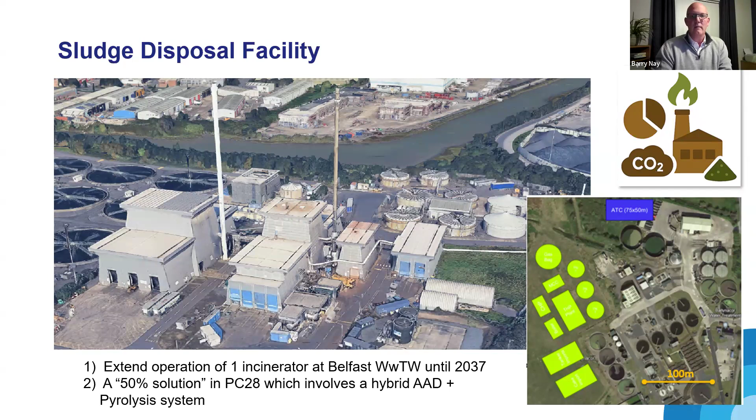Our proposal is to take one of the sludge facilities that is at end of life and replace it with a pyrolysis plant, which will be based in Ballynacor, which is Portadown, to take advantage of the new technology in PC28.

Then we have critical maintenance. We have an absolutely vast array of assets, sites, facilities across the country. There are hundreds of water sites. These range from our beautiful impounding reservoirs like Silent Valley, water treatment works across the country, service reservoirs, clear water tanks, pumping stations that keep our network at high pressure to your taps, and thousands of kilometers of water mains, trunk mains, distribution mains, enough in fact to go three quarters of the way around the world.

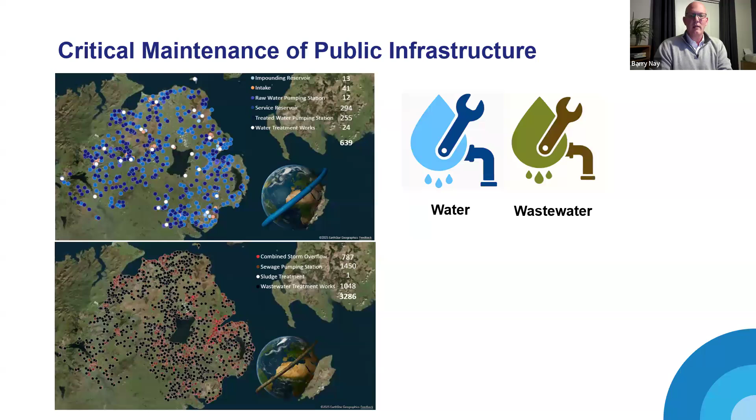Secondly, we have an even bigger public wastewater system. We have over 1,000 treatment works, nearly 800 overflows, 1,400 pumping stations, and again sewers, something in the order of 17,000 kilometers of sewers that we have to maintain, operate, and keep in good working order.

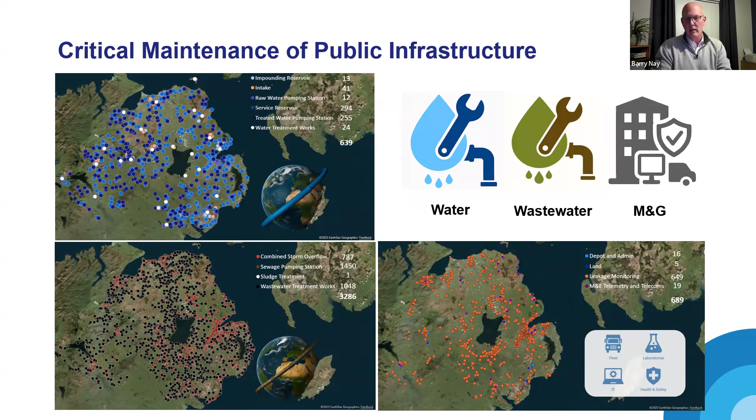And then we have a lot of depots and admin buildings and land, telemetry masts, etc. We have a fleet of vehicles we have to maintain, a laboratory, we have IT systems and health and safety systems that all fall within our management and general area. But as you can see, whether it's a soft asset, a hard asset, a linear asset, there is an absolutely vast amount of infrastructure that we have to keep going all the time to protect it. And so it serves the public.

In fact, our priority one is to keep our current assets healthy. If our assets are not maintained, they fail, they stop working and can lead to severe consequences such as water shortages, water quality incidents, severe watercourse pollution, property flooding, health and safety incidents, and even cyber breakdowns and shutdowns. We have consultants across the water industry helping us with our asset health right now. We have more data than ever before to show the life of the asset and assets which are actually expired and even sub-assets that have expired.

In order to determine the established needs in our maintenance assets, we are doing a bottom-up asset health approach for the first time through a range of modelling techniques. Plus, we're getting some independent assurance and econometric benchmarking. We anticipate that 1.2 billion of base maintenance will be required in PC28.

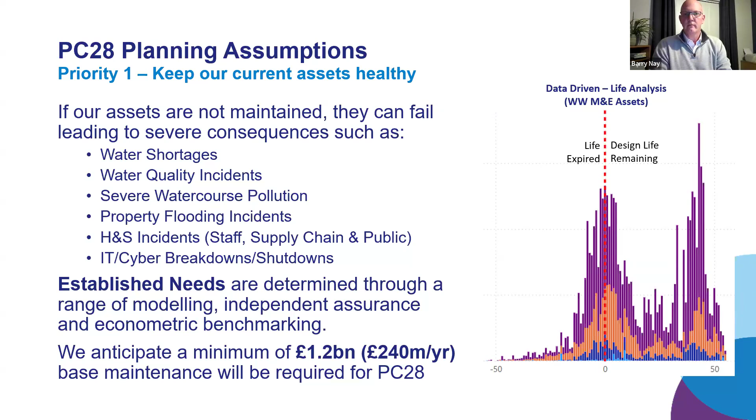We have 6 further enhancement themes across all of our assets. The first is cleaner, safer drinking water. Our water treatment plants need to be upgraded to meet stricter water quality standards that are being forced by the Drinking Water Inspectorate. These upgrades remove harmful pesticides and weed killers from our raw water and treat things such as THMs, which are byproducts from the chlorination and disinfection of water that we have to take out of the system.

We then have water on demand. Our summers are getting hotter and longer, making the public system more resilient so we can meet peak demands in hotter months and for longer, drier periods. This means boosting the network pipe and pumping capacity and increasing the volume of drinking water that we store so that we can manage peaks and demands, so we're not impacted by hose pipe bans, etc. in the future.

Then we have a very unique theme that is arising, which is Lough Neagh taste and odour. The blue-green algae that is manifesting in Lough Neagh eventually reaches our treatment works. Now, our treatment works are good at stripping out anything that is dangerous associated with raw water. It's very safe to drink. However, at peak times during the blue-green algae season, it can leave an unpleasant taste and smell for some of our customers at the tap, which, although not harmful, is very annoying and unpleasant. And so again, the Drinking Water Inspectorate has asked us to address these issues.

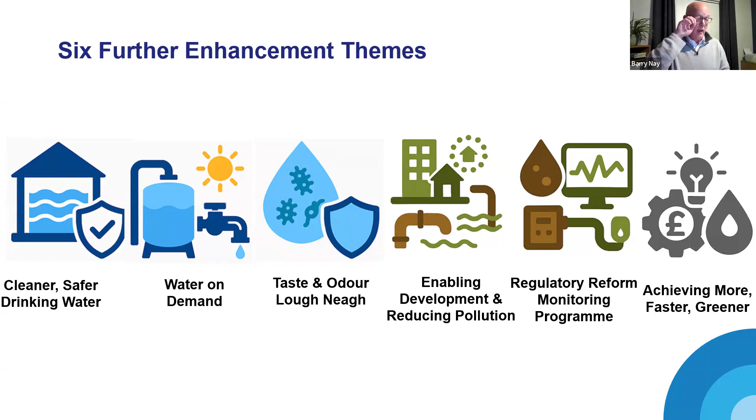At the same time, the Environment Agency is implementing a regulatory reform, setting the bar for our wastewater systems higher than ever, looking at the monitors at our overflows, unannounced sampling, catchment improvements, etc. And finally, we also as a business have to transform and innovate at the same time, driving efficiency of everything else to make the most of every pound that we are gratefully awarded.

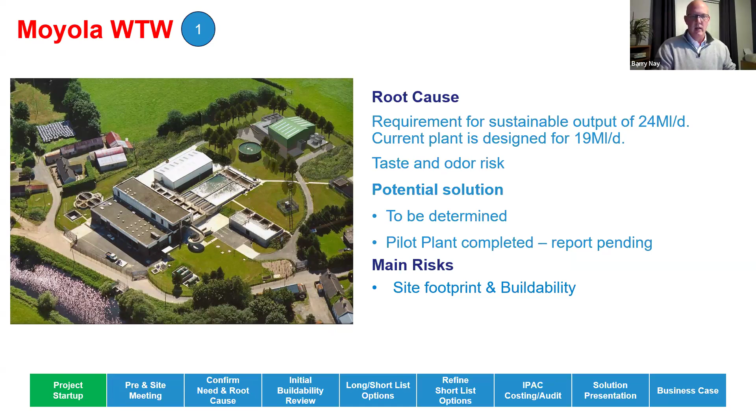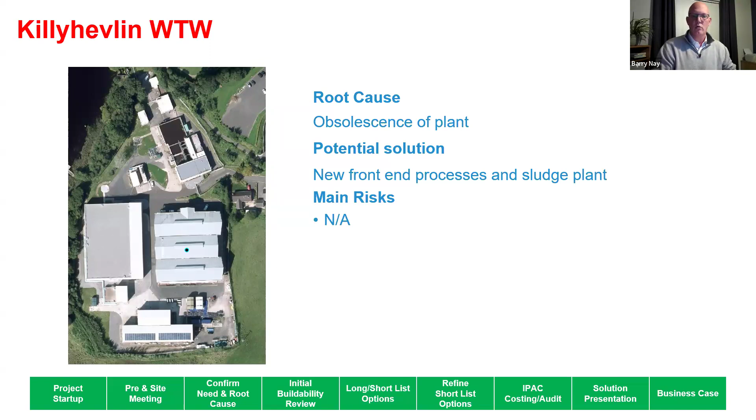Some of the big projects that are likely to manifest is Moyola Water Treatment Works. That is in the northwest of Lough Neagh. We require an extra 5 megalitres a day, and there's a taste and odour risk from the blue-green algae. Killyhevlin Water Treatment Works also is an interesting one. The process uses a thing called magnetite to filtrate the raw water, and that material is no longer available in a few years' time. So we have to recreate a new front end of this process to replace the magnetite stages of this water treatment works.

Castor Bay, one of our biggest water treatment works, also needs more water for the hot summers. At the same time, some of the internal systems, the primary filters, are undersized and not up to full UK best practice.

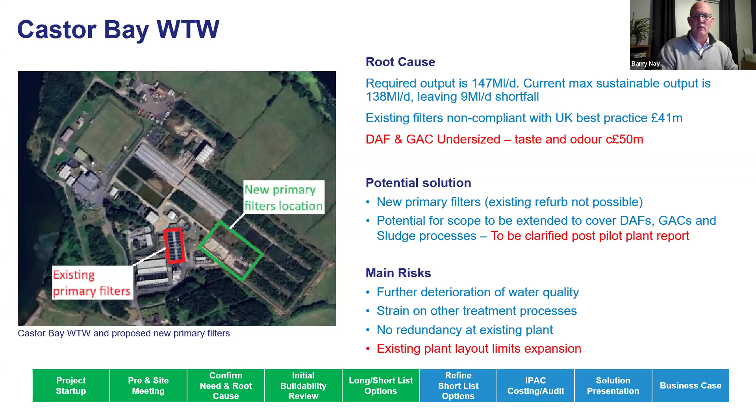And it is also susceptible to the blue-green algae. So we have a lot of water treatment works. I haven't touched the trunk mains and distributions in this presentation, but there's also trunk mains and service reservoir projects as well to go along with the water needs.

On the wastewater side, where probably the money is most likely to be constrained, we're following a new wastewater optimization process called EOIB, a catchy name, but it stands for Eliminate, Operate, Invigorate and Base. What we do is we take the need as seen by the regulatory drivers, and we try and eliminate it at source by talking to traders, looking for ingress, challenging the water order consent with state-of-the-art environmental models and simulators, and even changing customer behaviour to stop blockages, etc.

Once we've done that, we look into operating in different ways and invigorating the system using instrumentation, automation, efficient new cleaning systems, chemicals, energy optimization to squeeze as much as we can out of the assets that are there already. And then we do complementary base at the same time to replace M&E that is reaching end of its life. Only when that is done do we then look at enhancing the treatment works further.

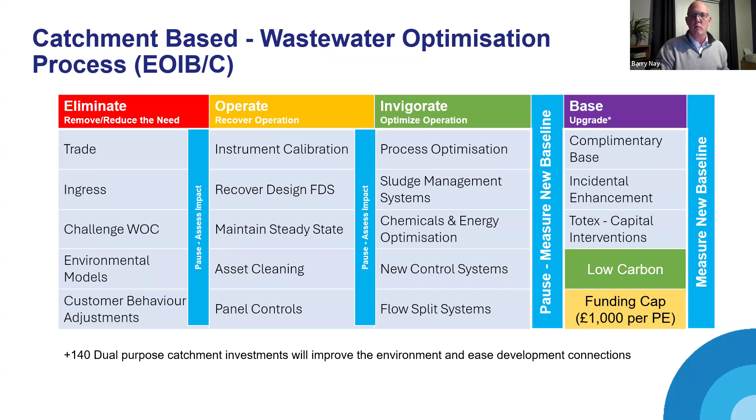Our PC28 plan sets out to deliver approximately 1/3 of these established needs. You can see that the M&G portfolio is 0.3 of 0.4 billion and the water portfolio is 0.9 of 1.3 billion. But the wastewater needs will take 4 or 5 cycles at this level of investment to fully resolve.

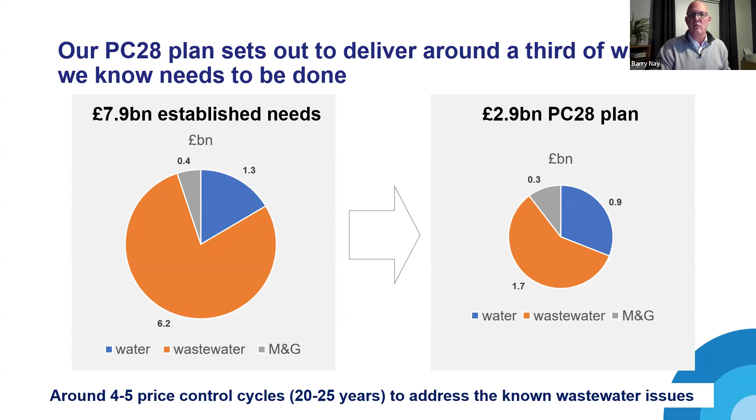When we come back to our graph and look at the top established needs based on the UR's regulatory principles, we can see the sludge disposal facility is good. 1 out of 2 sludge incinerators will be replaced. Capital maintenance is good. It'll be 50 to 60% of all envisaged capital maintenance can be undertaken.

Similarly, our essential maintenance for our fleet IT systems can be addressed. Water enhancement is about 60 to 70% of all the envisaged needs on our water systems. And then the wastewater enhancement, we make good progress into tackling approximately £1 billion worth of the 5 billion that has been identified.

So how do we actually turn this into a plan which can be delivered over 5 years? Well, the first thing we have to do is look at the glide path into PC28 itself. This year, we have £360 million of capital investment that has been secured already. And there are still some options for further investment for the remainder of the financial year.

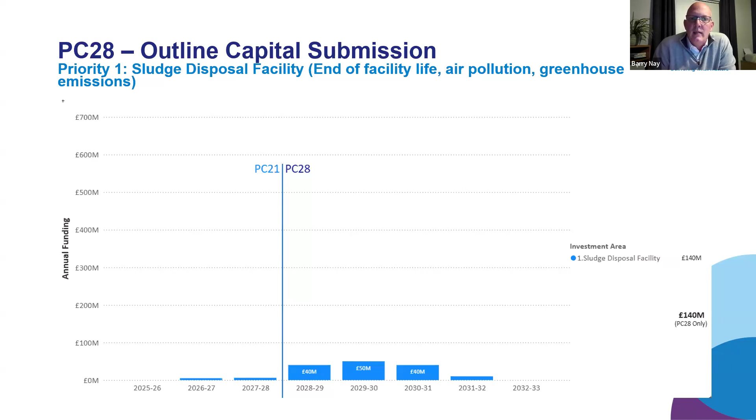So priority 1 is our sludge facility. We cannot let that facility die. It is a singularly unique facility on the island of Ireland and is required to get rid of all of our sludges. We have to have a sludge facility. If it's at end of life, we could replace it. We could put massive capex into refurbishing it, but you're still talking about tens of millions of pounds of investment to replace one of the incinerators. The second priority is capital maintenance.

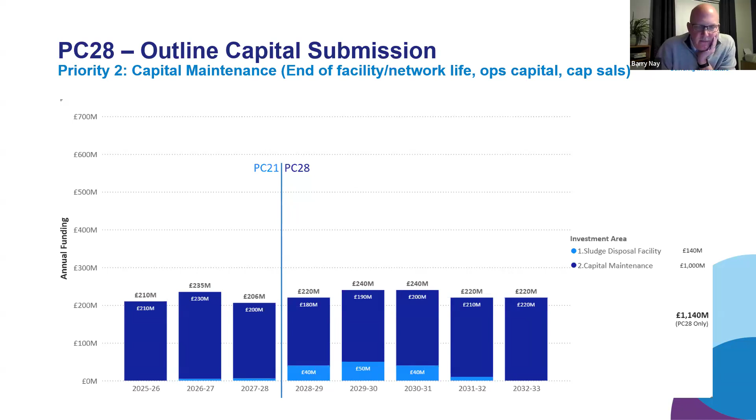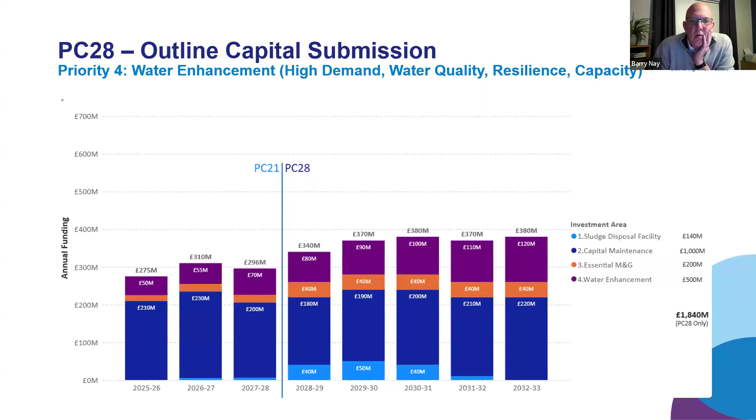We estimate we need about 200 to 240 million pounds of capital maintenance every year in PC28. Then our essential M&G maintenance gets added to that, as I've described before. Our water enhancement projects associated with water quality and sufficient water and the blue-green algae taste and odour issues. And then the remaining investment is as much of the wastewater enhancement as we can do within the deliverable envelope.

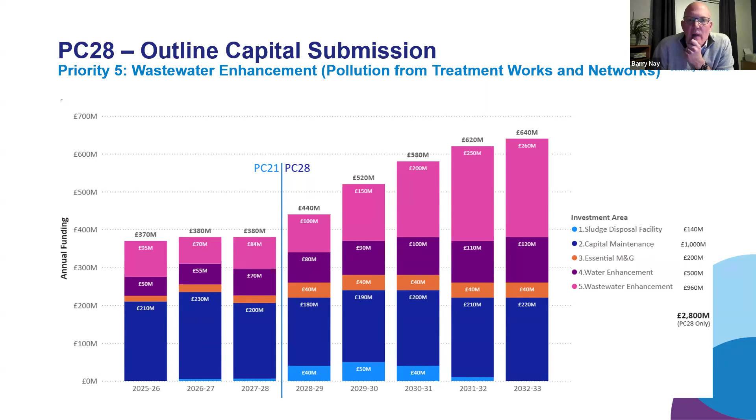And finally, an allowance for efficiency. That means that we can squeeze more out of the budget that we have for all of the elements beneath.

So I just want to highlight some consequences of funding shortfalls. We've shown you how the build works, but if the current funding level that we have is maintained, we will be unable to facilitate much of the wastewater programme and indeed the water enhancement programme. So we're really hoping that more investment will be available for the next price control.

If we look at what's called the reasonable worst case funding scenario that we've been provided for this analysis, it only really undertakes about 1% of the established needs for the wastewater enhancement, the economy and pollution issues. Because we have to protect capital maintenance, the consequences of not undertaking capital maintenance, not undertaking the sludge facility and the essential M&G are more severe than not undertaking the wastewater enhancement programme.

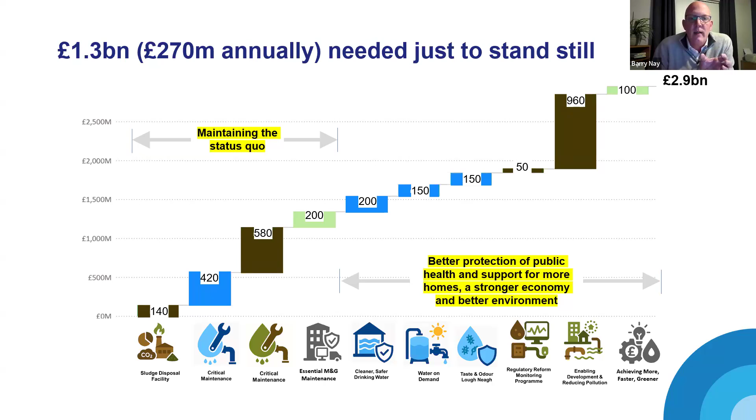So when we put in the 3-2-1 planning scenario, this barely scratches the surface of what needs to be done. Even our current funding envelope just enables the water elements of our enhancement to be done. The full request for the regulatory principles set out by the utility regulator would mean we can make a really

big dent in the needs associated with regulatory reform in the future, to bring parity for Northern Ireland regulation with England and Wales, enabling vast amounts of development across the country and also reducing pollution in this dual purpose driver. And we will be able to do it more efficiently and with more evidence than ever before.

So in summary, we have a 2.9 billion, 10-point regulated plan promising to deliver what's needed, which is better health, more housing, stronger economy, cleaner environment. This means we'll be transforming and innovating to achieve more, faster, greener, less pollution and more wastewater capacity to connect

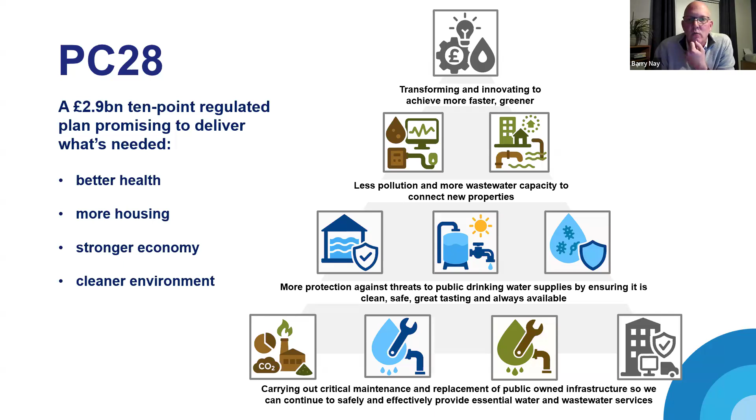new properties. More protection against threats to the public drinking supplies by ensuring it's clean, safe, great tasting and always available, and carrying out critical maintenance and replacement of publicly owned infrastructure so we continue to safely and effectively provide essential water and wastewater services.

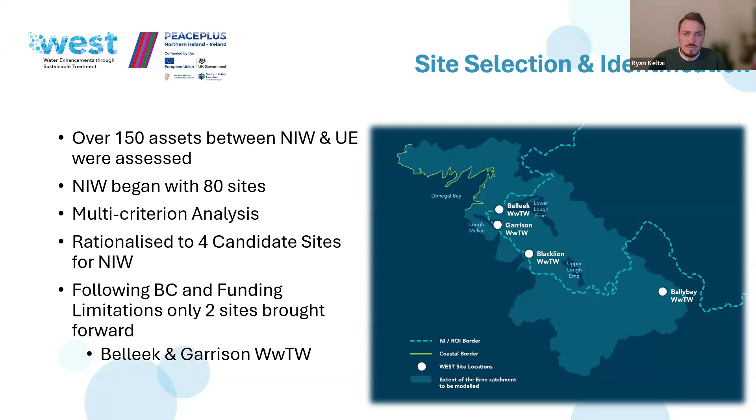So in terms of site selection, significant work pre-application was carried out by both water companies to identify the assets within the priority catchments that were failing to meet effluent quality compliance or operational performance requirements. In total, over 150 wastewater treatment assets were assessed across the priority catchments on both sides of the border.

The multi-criterion analysis to rationalise the 80 NI Water sites involved looking at their inclusion in the existing PC21 funding plan, operational issues, capacity issues, compliance against discharge consents, WFD status, for example, as you can see in the map there, if they're discharging into rivers of less than good status or their failing parameters were attributed to wastewater treatment works. Following an initial screening of the 80 sites down to 8, we began to investigate the feasibility of sustainable treatment solutions, such as is there sufficient land available for these solutions?

We then discussed with CNOD, the Customer and Operational Directorate in NI Water, and external stakeholders such as NIEA to assess if they were on their priority lists, and subsequently narrowed it down to 4 candidate sites: Belleek, Garrison, Fivemiletown and Erne. Following business case development for these sites and funding limitations on the WEST budget, only Belleek and Garrison were able to be taken forward within the application.

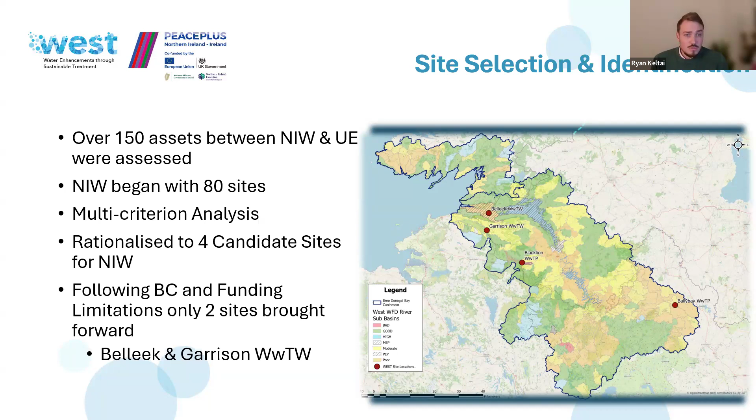So in our evolving world, there's a need for sustainable treatment solutions where conventional treatment plants tend to be highly energy intensive. More stringent discharge consents under the Water Framework Directive will result in higher carbon emissions by water companies. Widespread adoption of low energy, nature-based solutions is fundamental to achieving sector-wide net zero targets, and they also have associated environmental benefits that tend to be more socially acceptable.

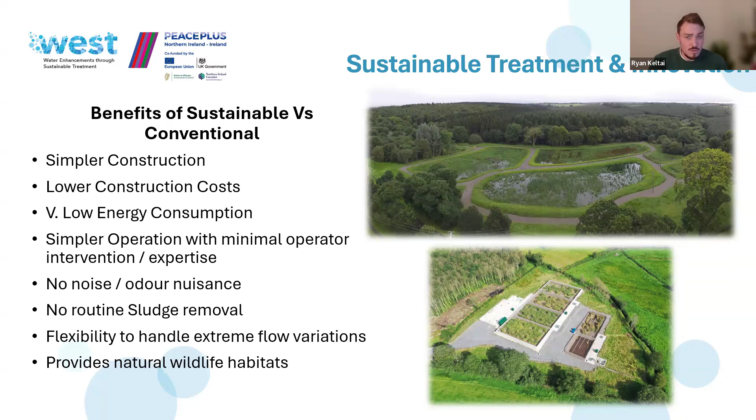Now, various sustainable treatment technologies were researched for suitability, including but not limited to reed bed technologies, including aerated systems, integrated constructed wetlands, oxidation lagoons, SRC willows, microalgae-based technologies, reactive media filters. So the preference here was for well-established, proven technologies that were relatively new to the local water sector. Various suppliers were approached and their processes assessed for suitability at the identified sites.

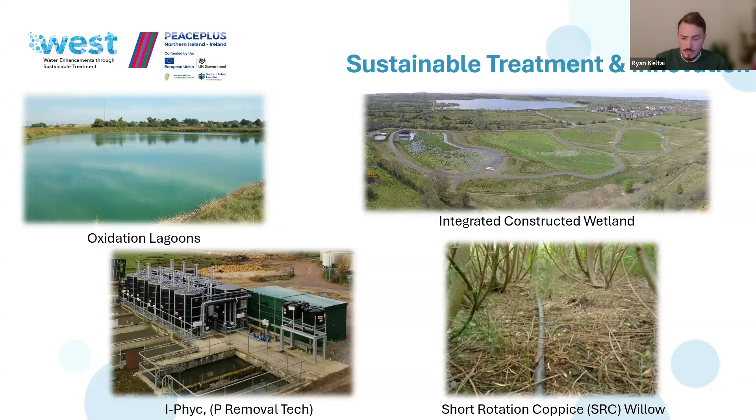Now, site visits and consultations were also carried out with other UK water utilities with operational experience of sustainable technologies, including Scottish Water, Yorkshire Water, and Northumbrian Water. I'll now move on to talk about the 2 NI Water demonstration sites.

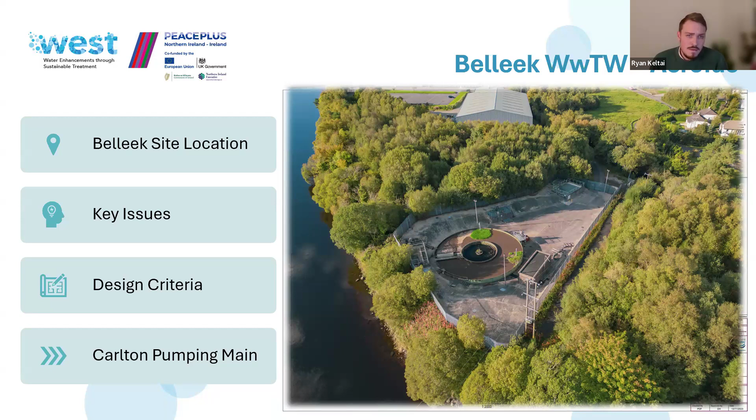So Belleek is located in a relatively small town in County Fermanagh, west of Enniskillen. The original wastewater treatment works was built in 1982 and consisted of a compact activated sludge process, with a number of upgrades carried out at the site, such as new inlet screening. With the current population of Belleek now exceeding its design capability and struggling to be compliant with the existing discharge standards, the works is well due a major upgrade and replacement, considering the civil structures and tanks are now past their design life.

Other key issues at the works consisted of abnormally high flows arriving at the works due to network infiltration identified within the drainage area. So the replacement works, Aerofac in this instance, has been designed to meet a 25-year design horizon of 2,700 PE and treat Formula A flow.

Now, as part of the upgrade, we're also upgrading the pumps at the terminal pumping station, Carlton House, to ensure Formula A flow is passed forward to treatment. I'll now show you a 3D modeling representation of the Belleek site and talk about the process itself.

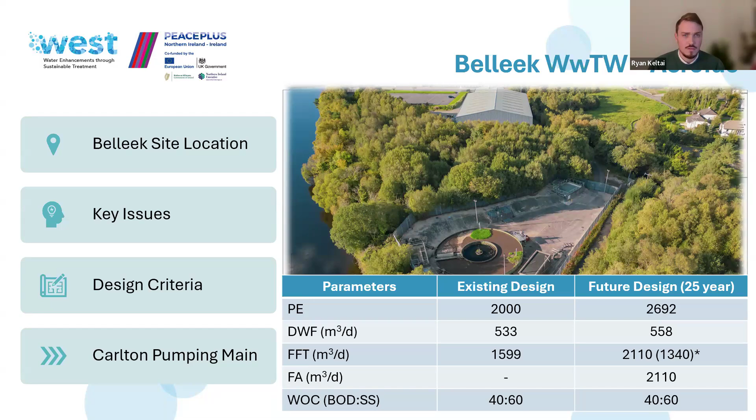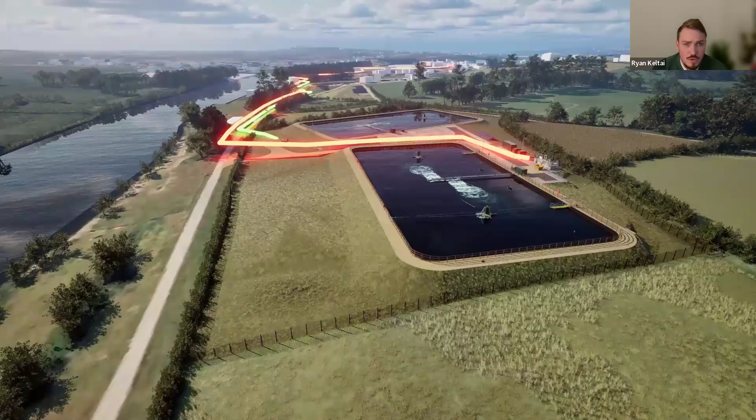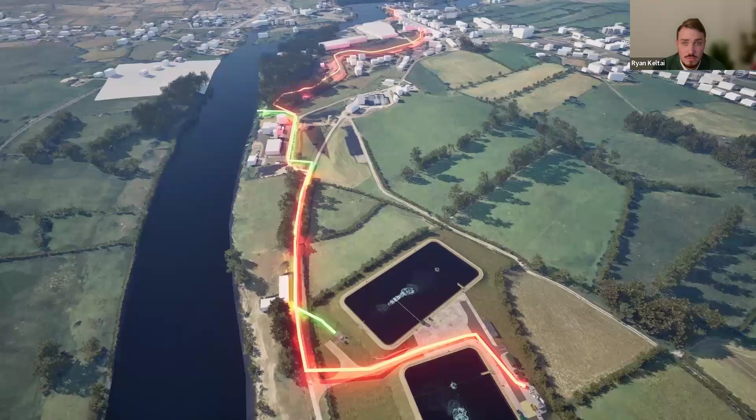So the Aerofac process at Belleek is the first of its kind in the island of Ireland, supplied by Gurney Environmental. It consists of a biological aerated facultative treatment process consisting of 2 lagoons with a total surface area of approximately 9,200 square meters. The screened sewage flows into the primary cell, where biological treatment takes place in 3 distinct zones: the upper aerobic processing zone, the specialized sludge water facultative bacteria zone, and the anaerobic sludge digestion zone, thus creating the necessary environments to ensure 100% treatment on site.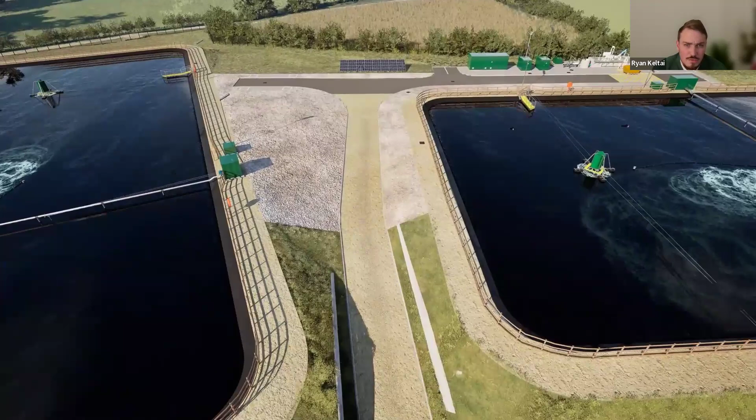The primary cell uses 2 baffle curtains for diffused aeration, complemented by the wind-powered electric aerators that operate continuously. The diffused air blower system only operates when the biological load increases and is prompted by the dissolved oxygen monitors within the cells. Now, the same process takes place in the secondary cell, however, with less aeration required due to the load reduction post-primary cell.

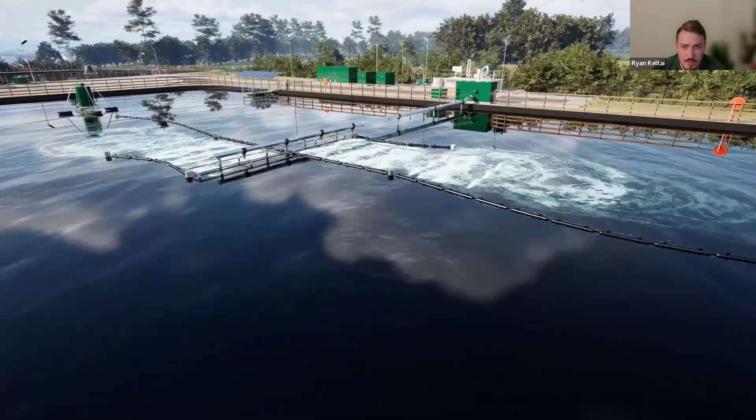The cells are approximately 5 meters deep, and water is retained within the structure utilizing a geotextile liner, with concrete only required for the baffle curtain and other ancillaries, such as the blowers that feed the baffle curtain system. Once through the 2 Aero-Fac cells, the sewage has reached an effluent quality of 40/60, to the 40/60 discharge standard, and is fully disinfected following the 20 to 30 day retention time that this treatment process provides.

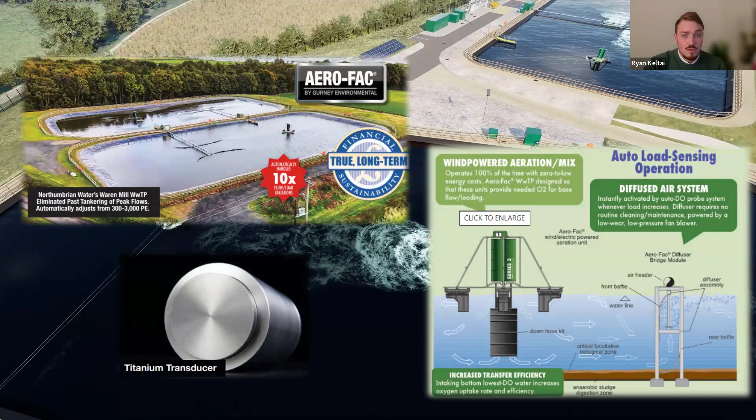Now, a concern that we had was algal growth within these cells, which following discussions with Erne revealed the technology that they use for this, an algae management system in the form of a titanium transducer called Titan, patented by Erne, which utilizes ultrasound that targets frequencies addressing a range of algal species, preventing their growth.

So in summary, the Aero-Fac process provides a low OPEX, low CapEx solution, provides extraordinary flow and load flexibility, being able to treat 10 times variations in flows, is an odorless solution, and removes the need for sludge management through the self-digesting sludge process.

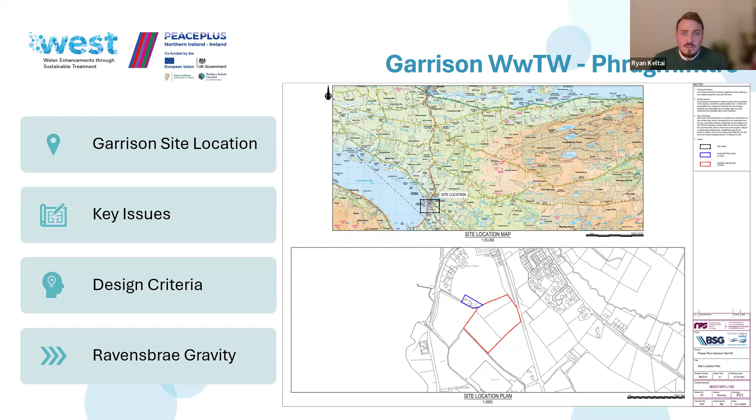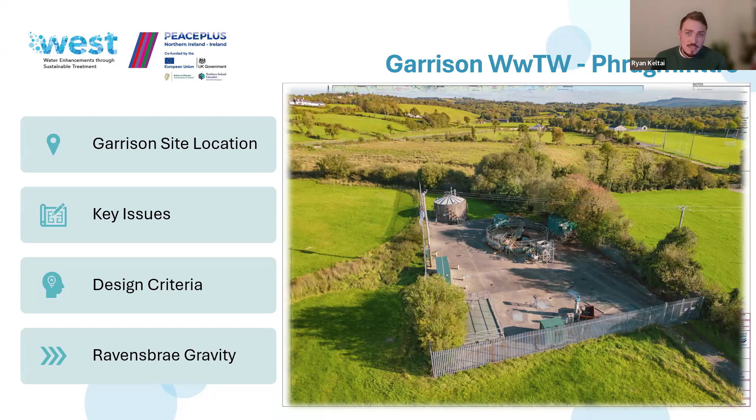Now, Garrison is another relatively small town located in Fermanagh, west of Enniskillen, discharging into the shores of Lough Melvin. The original wastewater treatment works was also built in the 1980s and consisted of the same process, a compact activated sludge process, and in 2005 it also had base maintenance work. With the current population of Garrison now also exceeding its design capability, as well as struggling to meet compliance with the existing discharge standard, the works is well due an upgrade, being past its design life also. The upgrade will also enable the development embargo to be lifted in this town.

Now, the replacement Phragmifilter works has been designed to meet a 25-year design horizon of 1200 PE and will also treat Formula A flow. Now, as part of this upgrade, we're also addressing a part of the catchment that over the years has seen untreated sewage discharging into Lough Melvin, and as such, we will be incorporating the Ravensbrae catchment via a new gravity sewer to convey it into the new wastewater treatment works at Garrison.

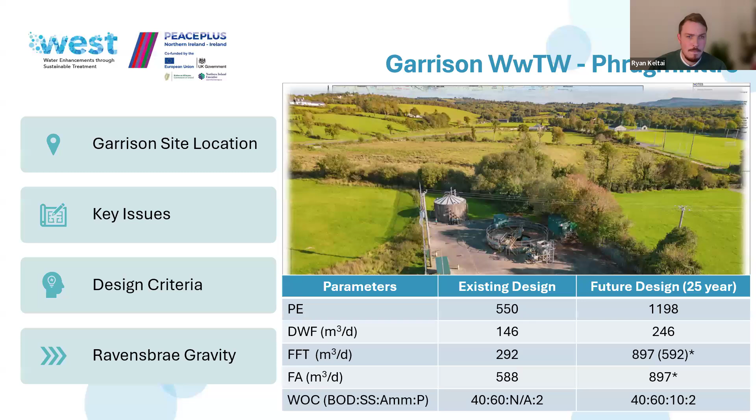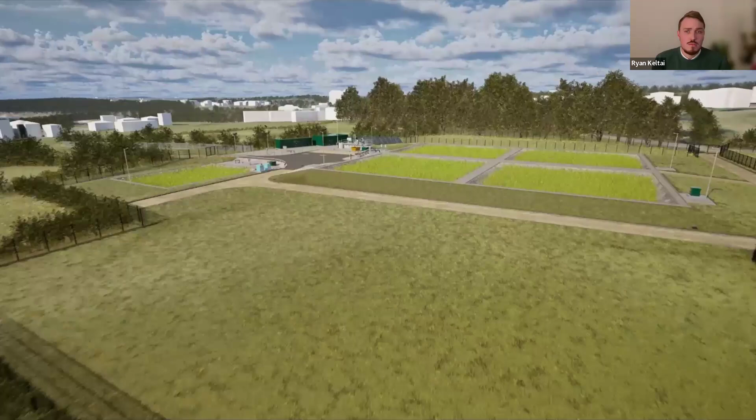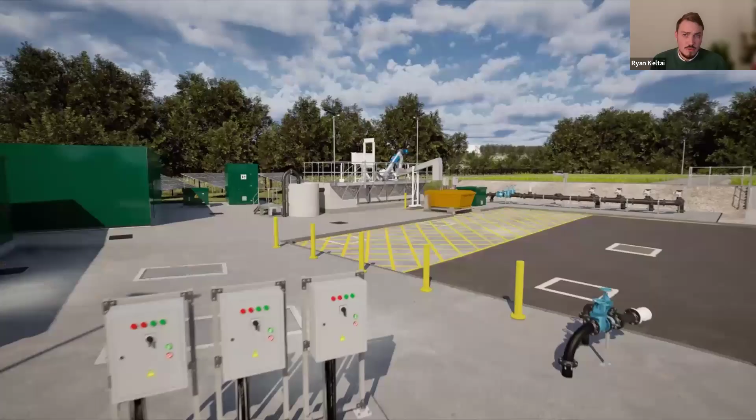So the Phragmifilter process at Garrison consists of a two-stage aerated reed bed system supplied by Erne to provide full sewage treatment, consisting of 4 primary stage reed beds and 1 final stage reed bed. This solution is being developed on land adjacent to the site, and we are currently negotiating with the local Gaelic football club to enable a connection of their 2 football pitches via a greenway pedestrian walkway around our site. As part of this solution, we're also maintaining the ecological status of a high-value meadow within the land area purchased by translocating it to parts of the land we are not developing.

Moving on to the process, the screened sewage is pumped in controlled batches to the primary reed beds, operating in parallel for the treatment of the biological matter and suspended solids, which occurs by filtering through the two gravel layers, the upper fine grade and the lower larger grade, creating a fully drained unsaturated condition. Now, the upper layers trap solids and rags and form a sludge layer, and the lower layers are where the organic matter is consumed as a result of the biofilm developed on the larger gravel media.

Now, the rotation of the beds allows for dewatering, drying, and composting, and also enables oxygen to refill the voids to aid BOD removal and nitrification. The second stage reed beds are mainly used for polishing and completing the BOD removal and nitrification process.

However, the second stage reed bed also included forced bed aeration technology to decrease the footprint of the final stage. With this process being successfully trialled at Clabby, built in 2019, it proves to be another nature-based solution used to tackle the drivers of the West project.

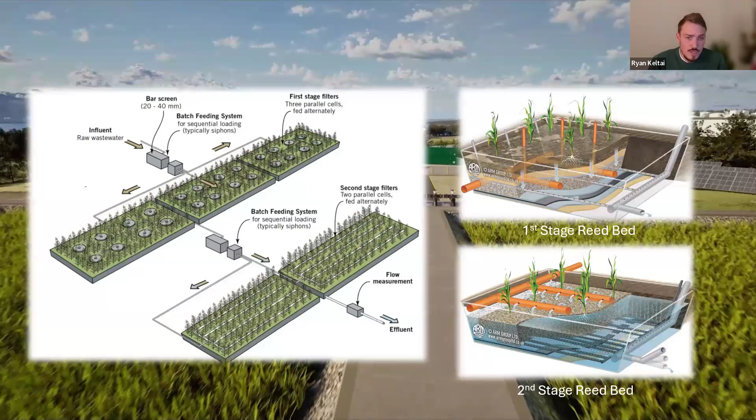If you remember in the videos there was green GRP kiosks both at Belleek and Garrison. In recent weeks, we have explored new innovative solutions such as timber modular build kiosks, as opposed to traditional glass fiber reinforced kiosks. We are seeing these timber kiosks installed by Scottish Water, and the supplier RSC is now seeing over 32 sector-wide water installations to date.

RSC case studies are reporting over 70% reduction in embodied carbon with 25-year design lives, and exceeding fire-resistant regulations compared to GRP kiosks. With the sustainable nature-based solutions being implemented at Belleek and Garrison, these timber kiosks would further benefit the solution, as well as provide a more sustainable aesthetic to these sites.

With the project officially launched in November 25, funding secured, planning approved, the two NI Water sites are expected to break ground in Q1 of 26 and complete by November 27. The project team delivering the two sites involves McAdam Design, BSG, RPS, and key suppliers Erne and Erne. The overall West project, including the modelling, the strategies, and action plans, is also expected to complete by December 28.

So thank you for your time, and when you get a chance, please feel free to visit the project website where you can learn more about the project, the modelling that we're doing, and get access to the 3D models developed for the NI Water sites. Thank you, and I welcome your questions.